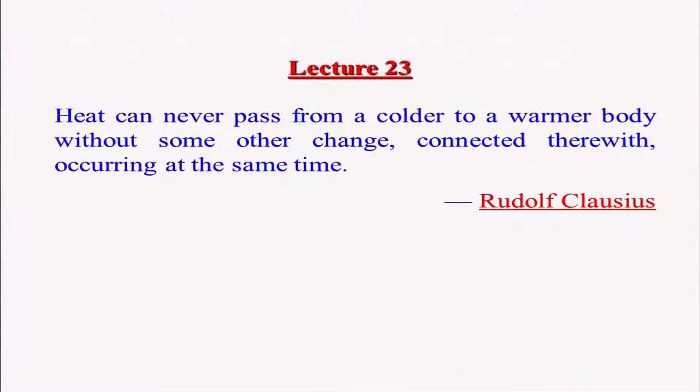We looked at two corollaries, Carnot corollary 1 and Carnot corollary 2, and we will now take up an example to see how you can apply the Carnot corollary and solve a problem. So let us take an example.

This example is related to a claim being made by an inventor, which is a thing one has to clarify by invoking the second law of thermodynamics. The example is like this: an inventor claims to have designed and developed a new heat engine that can produce 45 kilowatts of power by absorbing 52 kilowatts of heat from a thermal reservoir at 700 Kelvin while rejecting heat to the sink at 300 Kelvin. Is it true or false? That you need to find out.

If you look at this problem, the question arises whether the first law of thermodynamics is being satisfied or not, and then we need to look at whether the second law of thermodynamics is being satisfied or not. It is absorbing 52 kilowatts from a thermal reservoir at 700 Kelvin and producing 45 kilowatts of power. That means whatever heat is absorbed, some portion goes to the sink at 300 Kelvin and 45 kilowatts of power is produced. That means it looks like it may be true. Let us look at whether it is true or not.

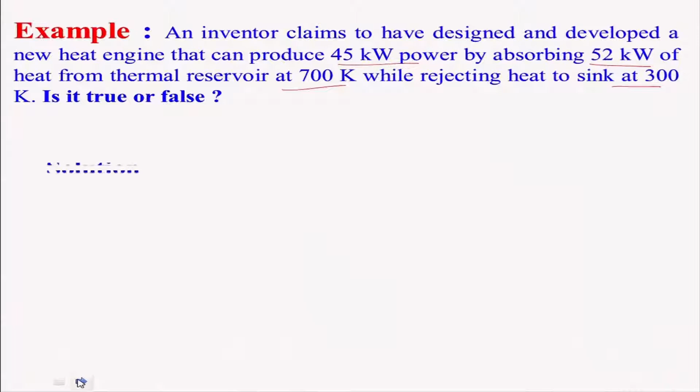For that we will have to find out the thermal efficiency. Thermal efficiency is nothing but W dot by Q dot, and the work produced by this heat engine is 45 and the heat absorbed from the source is 52. The efficiency is 86.5%, quite a bit.

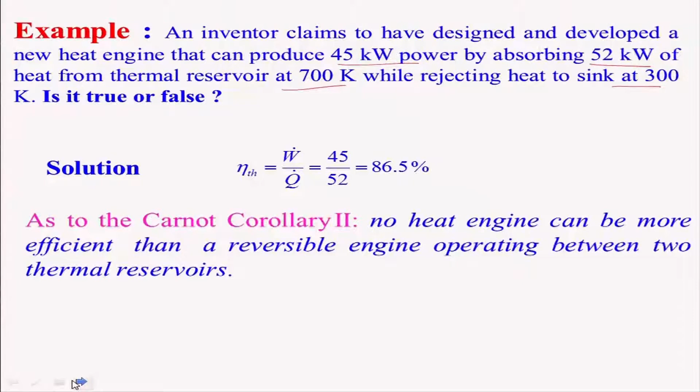Now we will have to invoke Carnot corollary 2, which says no heat engine can be more efficient than a reversible engine operating between two thermal reservoirs. Suppose this is the actual engine whose efficiency is 86.5%, and if a Carnot heat engine is operated between the source at 700 Kelvin and the sink at 300 Kelvin, what would be the efficiency? Efficiency equals 1 minus TL by TH, where TL is 300 Kelvin and TH, the temperature of the source, is 700 Kelvin, giving an efficiency of 57.1%.

That means a reversible engine gives 57.1%, while the inventor is claiming an efficiency of 86.5%. Therefore, it is not really possible, and hence the claim of this inventor is false. So using this very simple method, one can really find out whether such a claim is true or not.

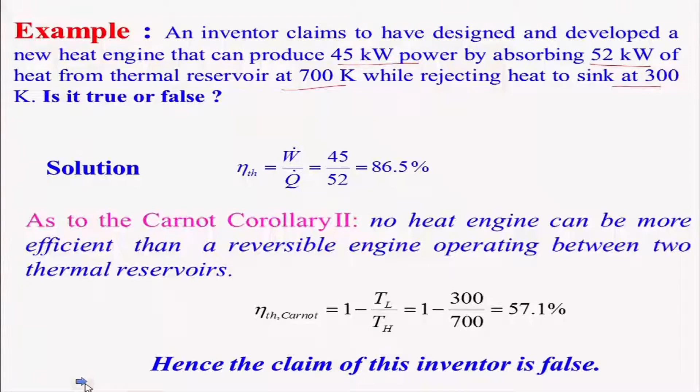Let us now see how we can apply the second law of thermodynamics for a temperature scale, which we have already discussed earlier. Let us devise a temperature scale which won't be dependent on the properties of the substance, which we have already defined as a thermodynamic temperature scale. If you recall, that is the thermodynamic temperature scale, which won't be dependent on the properties of the substance, like what we use in a mercury in glass thermometer.

If you look at the temperature, what it will measure will be dependent on the expansion of the mercury. But if I use alcohol, then that expansion will be different. So it will be dependent on the substance, the thermometric fluid rather.

However, we need to devise a temperature scale which will not be dependent on the properties of a substance. So why is this required?

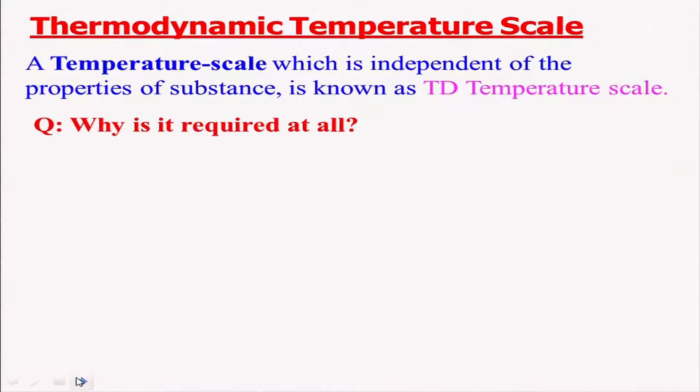We already know that whenever mercury glass and alcohol glass thermometers are used, even though they will be calibrated at the ice point and boiling point, they will give different temperatures at other points. You may calibrate at the same ice point and boiling point and assign those values, but if you deviate from the ice point and boiling point, it may give different values. For example, a mercury in glass thermometer will give you 50.12 degrees Celsius, whereas the alcohol in glass thermometer will give you 50.45 degrees Celsius.

Of course you may say it is not much, but accuracy-wise it is not good. So this indicates that the temperature scale is basically dependent on the properties of the thermometric fluid, because mercury and alcohol are different and their properties are different. Therefore we need a scale which is independent of the properties of the thermometric fluid or substance.

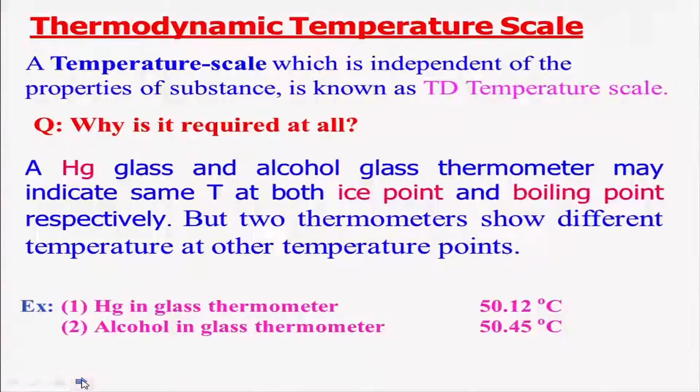So for that, we know that alcohol has different T-V relations, so it is very much required to devise a temperature scale. How can we devise such a temperature scale? For that, we will use the reversible engine concept from Carnot theorem 2.

We have seen that the efficiency of a reversible engine, or Carnot engine, is basically 1 minus QL divided by QH, which is equal to 1 minus TL by TH. This says that QH by QL is basically a function of TH and TL temperatures, both the source and the sink temperature - it is a function of them.

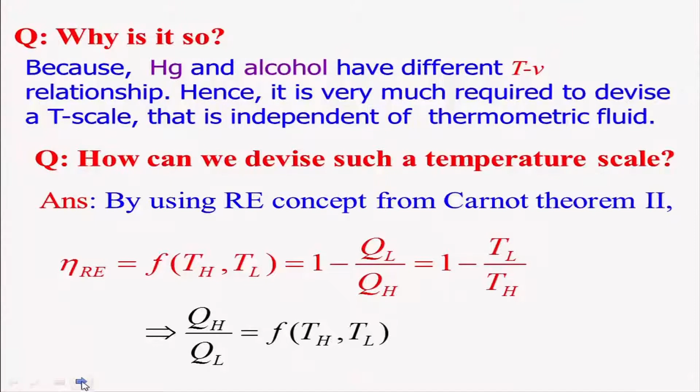So let us consider 3 reversible engines: reversible engine 1, 2 and 3. Let us say reversible engine 1 absorbs Q1 amount of heat and rejects Q2 amount of heat to sink 2, where T1 is greater than T2, and it does W1 amount of work.

It can act as a source or as a sink depending on the situation. Let us say another engine, the third engine, absorbs the same amount of Q1 from the source at T1, and it rejects Q3 amount of heat to sink 3, and it produces W3 amount of work.

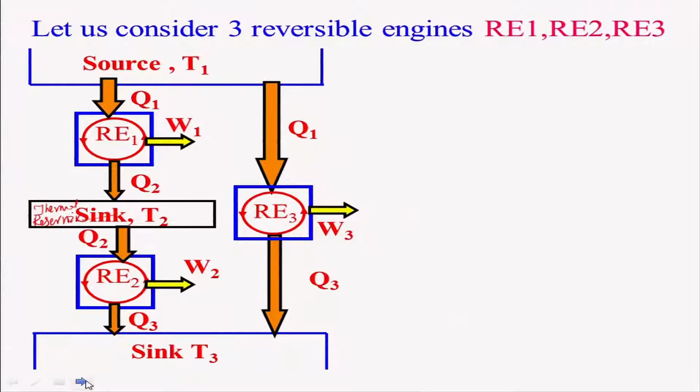Now if we look at engine 1, we know that Q1 by Q2 is a function of T1 and T2, if it is a reversible engine, as we have already seen. Similarly for engine 2, the Q2 and Q3 ratio is a function of T2 and T3.

T2 is the thermal reservoir 2's temperature, which will be acting as a source for reversible engine 2, while it will be acting as a sink for the first reversible engine. Similarly, for engine 3, we can say that Q1 by Q3 is basically a function of T1 and T3.

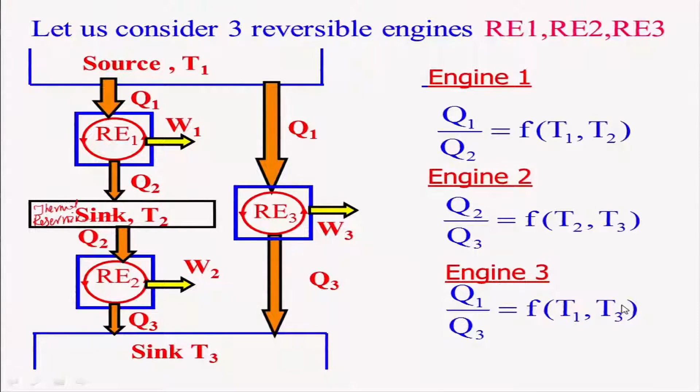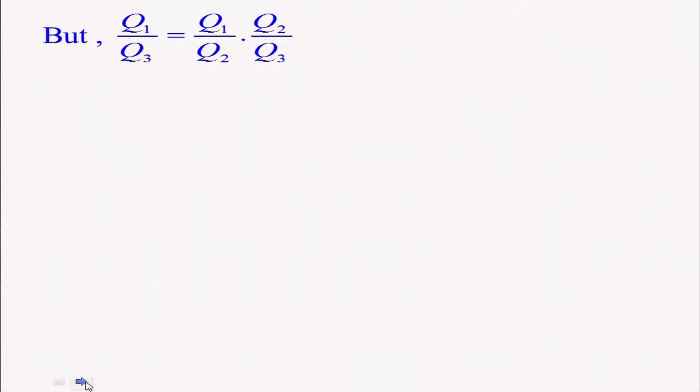Now if you say that Q1 by Q3 is equal to Q1 by Q2 into Q2 by Q3, this is possible only if we can say that Q1 by Q3 is a function of T1 and T3, Q1 by Q2 is a function of T1 and T2, and Q2 by Q3 is a function of T2 and T3.

So if you look at this, the LHS is independent of temperature T2, and the LHS is a function of T1 and T3, and the LHS is basically independent of temperature T2 - this is only possible if the function takes the following form.

If I say that this function f1 is equal to another function g of temperature T1 and T2, as a ratio of the temperatures T1 and T2, then the function f, which is a function of T2 to T3, is basically g(T2) divided by g(T3).

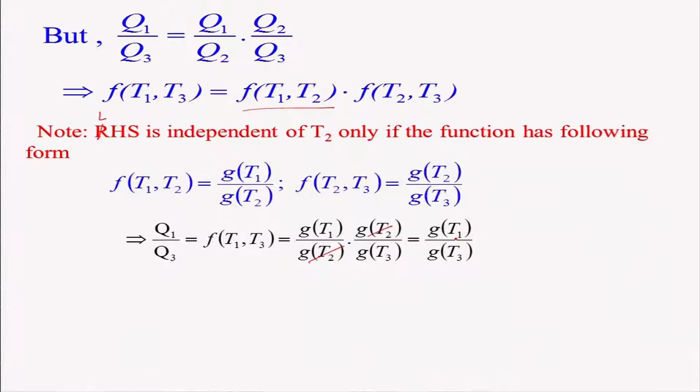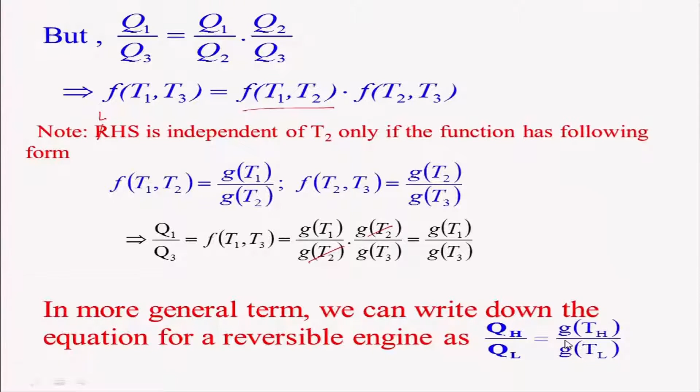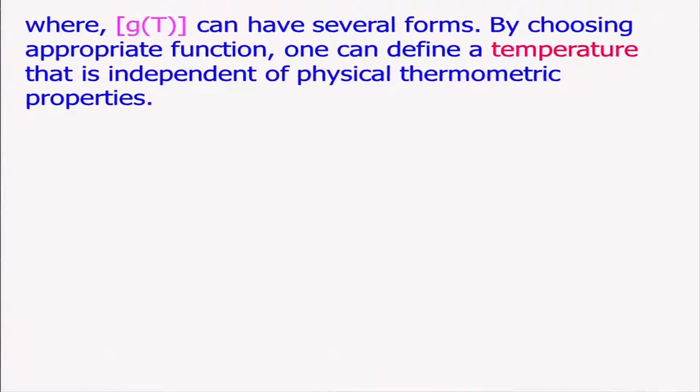If I say this, then it will cancel out, so we can say that Q1 by Q3 is a function of T1 by T3, two functions. Of course it can be any function. So in more general terms, we can write down the equation for a reversible engine as QH by QL is equal to G, which is a function of TH and a function of TL, where G can have several forms, you can think of any form. But by choosing an appropriate function, one can define a temperature which can be considered independent of the physical thermometric properties.

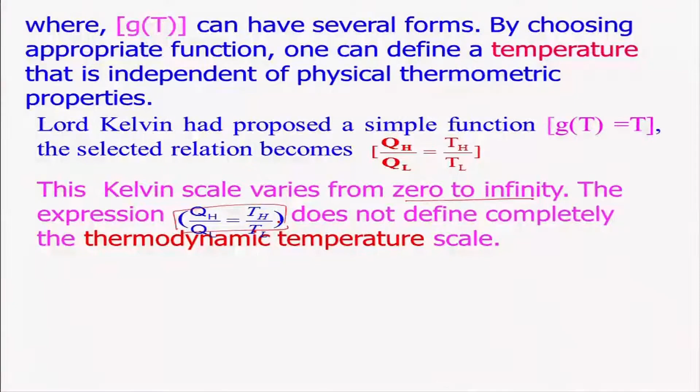Lord Kelvin proposed a simple function. He says g(T), that is the function, is equal to the temperature. Then the selected relation says that QH by QL will be equal to TH by TL. People have used complex functions and arrived at similar relationships. So this is the scale we call the Kelvin scale, which varies from 0 to infinity. The expression QH by QL does not really depend on the properties of the thermometric fluid, and even though it is a relationship, it does not completely define the thermodynamic scale, but it gives a relationship.

In 1954, the International Conference on Weights and Measures assigned a value of 273.16 to the triple point of water. As a result, you can get one point here, and then find that the magnitude of a Kelvin is basically defined as 1 by 273.16 Kelvin between absolute zero and the triple point of water. The triple point of water is 0.01 degree Celsius. So he has defined that, and absolute zero is considered to be 0 Kelvin. So by this way, one can use the second law of thermodynamics to define a thermodynamic temperature scale which will be independent of the thermometric fluid.

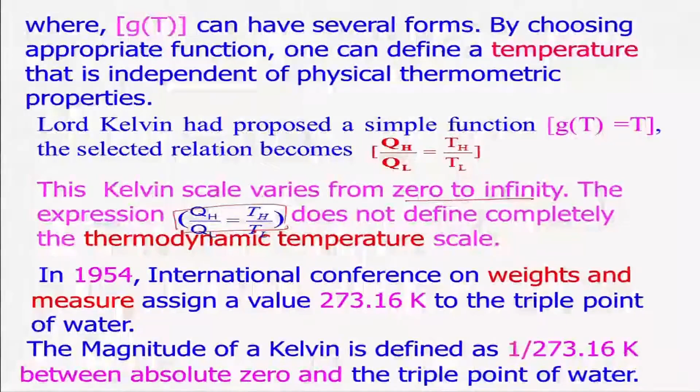So let us take an example to see whether this relationship can be used for solving some other problem. We have talked about a temperature scale, defining the Kelvin scale, and from that you can use it. But here we will be applying that for solving a problem.

Let us say a heat engine operated between a thermal reservoir at 500 Kelvin and ambient air at 300 Kelvin is used to drive a refrigerator to produce a temperature of 250 Kelvin by extracting heat of 100 kilowatt from the cold region. This heat engine is producing some work, and that work is being utilized to run the refrigerator. Assuming all the processes to be reversible, we need to determine the power produced by the heat engine, the ratio of heat energy absorbed by the refrigeration system to the heat energy absorbed by the heat engine, and also find out the amount of heat rejected to ambient air.

So let us say there is a source at T is equal to 500 Kelvin, and it is absorbing some amount of heat, let us say Q1. There is a reversible engine which is producing an amount of work W dot, and it is rejecting a certain amount of heat to the sink. The sink is at what temperature? That is at 300 Kelvin, and this is the same sink.

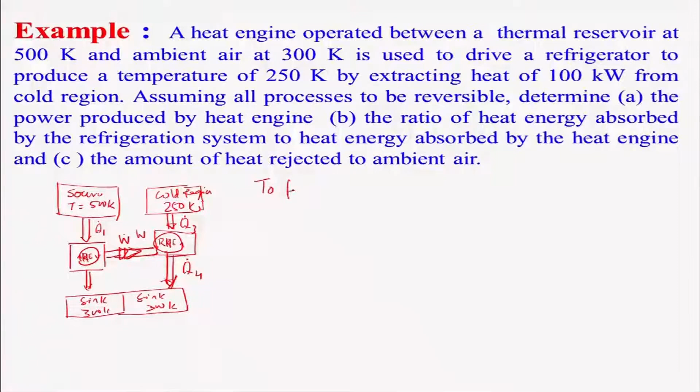Now, what is it to be found out? Basically we need to find the power produced, W, right, and that is W HE is equal to W RHE. RE is the RHE, let me put it, that means reverse heat engine, which is nothing but a refrigerator, right.

And how we will find out that? We know that coefficient of performance of the refrigerator, what is that? COP of refrigerator, if I say simply RHE, or I can say R is equal to, what is that? If I say this is TL, this is TL and this is TH, right, this I can say TR. Can I say that what will be coefficient of performance of the refrigerator?

That is nothing but your TR divided by TL minus TR, yes or no? We have already seen the coefficient of reversible refrigerator, right, or reverse heat engine, whatever you call. So, that is equal to TR is 250, this is 300, this is 250, is equal to what?

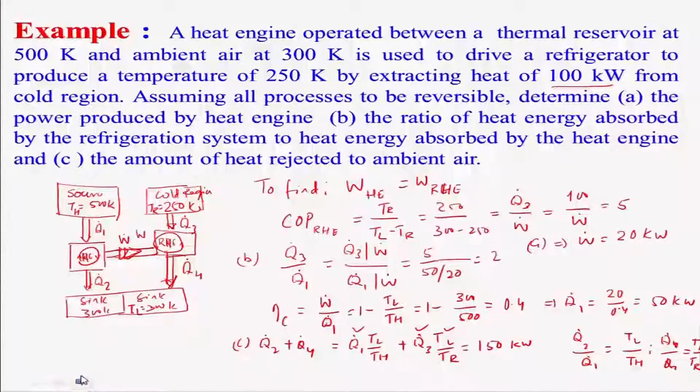Now what we will see is how we can use this second law of thermodynamics for other purposes, and we will have to apply this second law of thermodynamics for analysis of engineering problems. Whatever we have done is basically a cyclically operating device, but not all cyclically operating devices will be handled this way, we will also be handling various other cases. For that, let us consider the Carnot cycle, right.

In this case, the heat engine absorbs Q1 amount of heat, and it rejects Q2 amount of heat to the sink, which is at temperature T2, and it does W amount of work, because it is a reversible engine, right.

So for the Carnot cycle we know that Q1 divided by Q2 is equal to T1 by T2, and from this what can we write down? We can write down Q1 by T1 is equal to Q2 by T2, and I can take this out, that is nothing but Q1 divided by T1 minus Q2 divided by T2 is equal to 0. This is one relationship which we can derive.

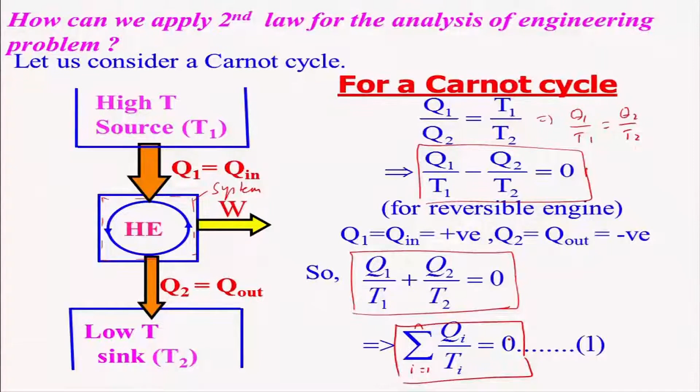So let us look at, because all the time we need not use the reversible heat engine, we will now consider the irreversible heat engine. Earlier we have considered the reversible heat engine, and now taking the irreversible heat engine, it is taking Q1 amount of heat from the source which is at temperature T1, and it is rejecting Q2 dash amount of heat to the sink, and it produces W amount of work.

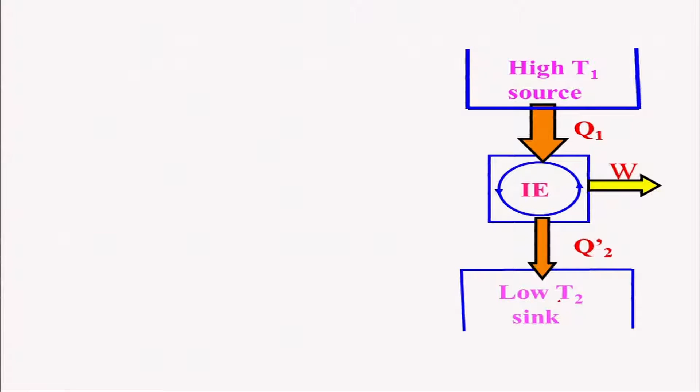So, for an irreversible engine, according to the Carnot corollary, the thermal efficiency of the irreversible engine will always be less than the reversible heat engine. So the irreversible engine efficiency will be 1 minus Q2 dash divided by Q1, and this is less than 1 minus Q2 divided by Q1.

And we know for the reversible heat engine, what will be the efficiency? Efficiency will be 1 minus T2 by T1, yes, from the Carnot, because the reversible engine is your Carnot. This corresponds to what you call Carnot efficiency, which is equal to 1 minus T2 by T1.

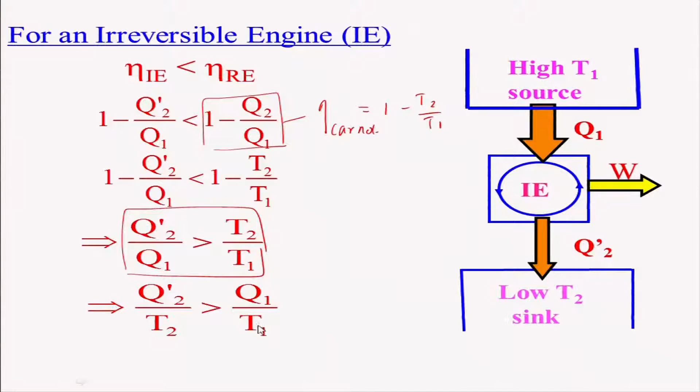So using the sign convention we have already discussed, in this case Q1 is basically being absorbed and Q2 dash is given to the sink, meaning it goes out of the irreversible engine. So therefore I take this negative, and I can write down that Q1 divided by T1 plus Q2 dash divided by T2 is less than 0.

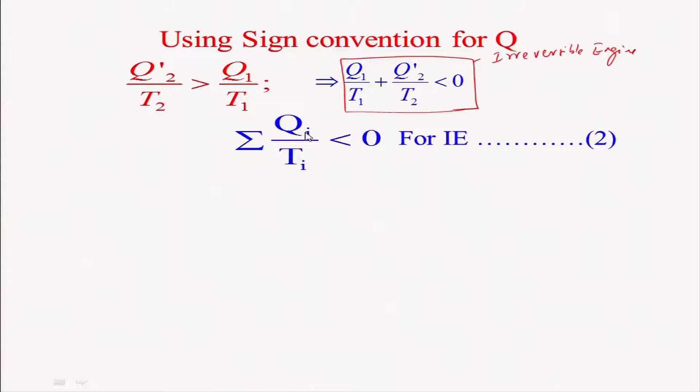So this is meant for irreversible engine. And if there are ith number of irreversible engines, I can write down summation of Qi dash i divided by Ti less than 0.

So if you combine this equation with the reversible engine, which is basically summation of Qi by Ti equal to 0, and the irreversible engine being less than 0, if I combine this I can write this expression: summation of this heat interaction Qi, for the ith engines,

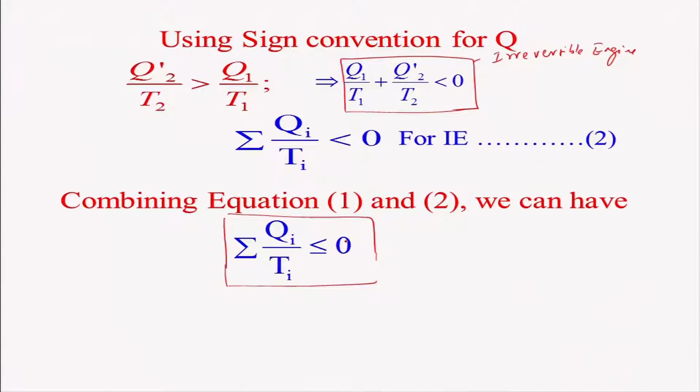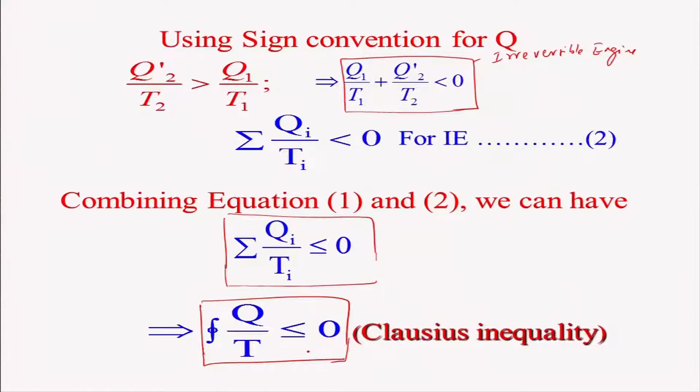divided by Ti is less than equal to 0, and that is nothing but your Clausius inequality. This is your Clausius inequality. What does it state? It states that whenever a system undergoes a cyclic change, however complex the cycle may be, the algebraic sum of all the heat interactions divided by the respective absolute temperature at which the heat interaction takes place, considered for the entire cycle, is less than equal to 0.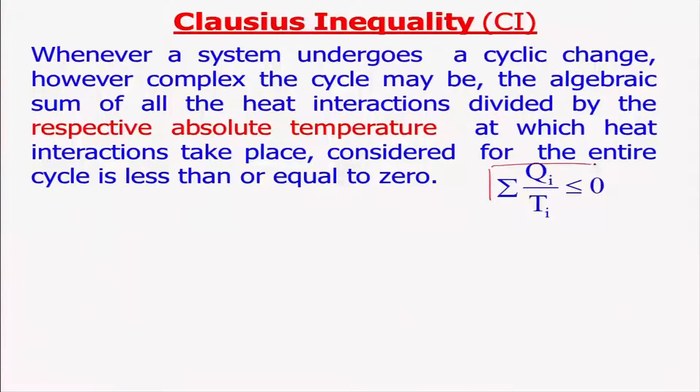That is the Clausius inequality, which we have just derived from the simple concept of the Carnot engine, that is a reversible engine, and we have also considered the irreversible engine. Mathematically one can write down the Qi divided by Ti, summed over all, is less than equal to 0. This is basically the mathematical expression of the Clausius inequality.

Keep in mind that this is basically the second law of thermodynamics, which can be applied not only for the heat engine but also for the refrigeration system, and which must be cyclically operated. That means it is applied cyclically.

Let us consider an example. A reversible heat engine operates between 3 reservoirs, at 600 Kelvin, 400 Kelvin and 300 Kelvin. It receives 2500 kilojoules of heat energy from the thermal reservoir at 600 Kelvin and does 1000 kilojoules of work. We need to determine the heat interaction with the other 2 reservoirs, that is 400 Kelvin and 300 Kelvin. So the question arises how to go about it.

Let us say this is the heat engine, I can take this as my system. Heat being absorbed Q1 is 2500 kilojoules, and some heat is rejected to the 400 Kelvin reservoir, and this engine also rejects Q3 to the 300 Kelvin thermal reservoir. And it does 1000 kilojoules of work, and keep in mind that this is a reversible heat engine.

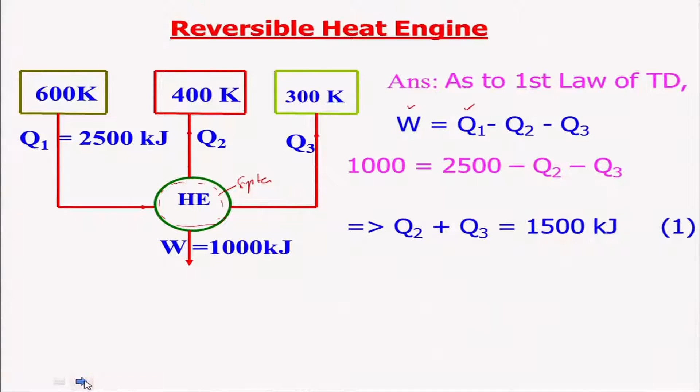So what will you have to do? You will have to apply the second law of thermodynamics. For this, we will use the Clausius inequality, that is dQ by T over the cycle is equal to q1 divided by t1 minus q2 divided by t2 minus q3 divided by t3, equal to 0, because this is a reversible heat engine.

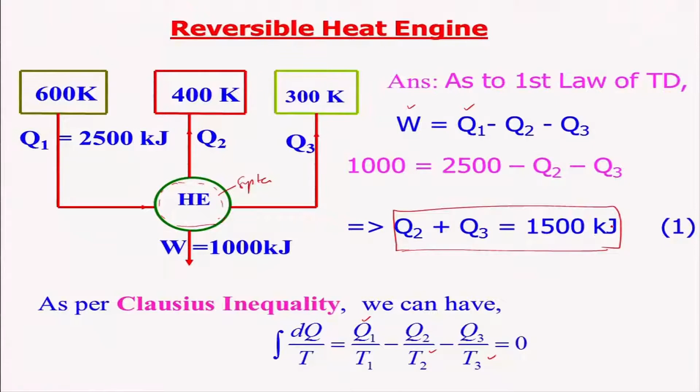In this case, q1 is given, and t1, t2, t3 are given, but q2 and q3 are not known. However, we can get an expression from here, and we have already derived an expression from the first law of thermodynamics, that is q2 plus q3 is equal to 1500 kilojoule. So if we solve these two equations, we can get the answer.

Let us see, we are getting q1 divided by 600 minus q2 divided by 400 minus q3 divided by 300 equal to 0. Why is it minus here? Because heat is going from the engine to the sink, so we have taken q2 as minus, and also q3, following the sign convention.

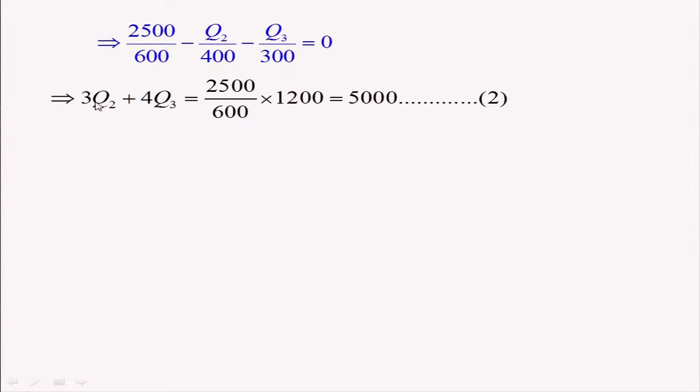That gives us equation 2: 3q2 plus 4q3 is equal to 5000. And if we already have the first law equation, if we subtract this one, it will cancel out, and we get q3 is equal to 500.

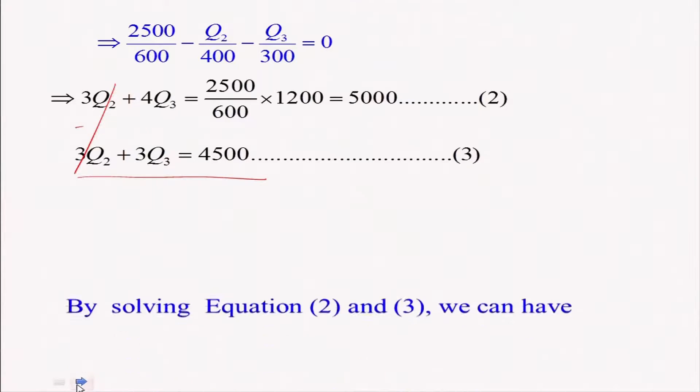From that, q3 is equal to 500 kilojoule, and from the other expression, using any one of them, Q2 is equal to 1000 kilojoule.

So till now we have seen how you can apply the second law of thermodynamics for a cyclic process. But not all processes are cyclic in nature. There will be some processes which are non-cyclic. Now the question arises how to go about it.

If you remember, we derived the first law of thermodynamics for the cyclic process first, and then applied it for the non-cyclic process. What did we do there at that time? Could you recall how we did it? We have done that already for the first law of thermodynamics.

The first law of thermodynamics says cyclic integral of heat will be proportional to cyclic integral of work, and then we say it is equal to J, the Joule's constant. From that we derived an expression, dE equals dQ minus dW, that is the first law for non-cyclic process. We will be following a similar procedure here.

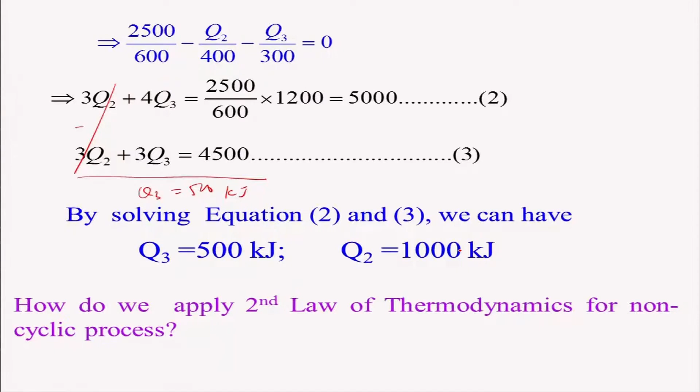If you look at it, we have seen that whenever a system undergoes a cyclic change, however complex the cycle may be, the algebraic sum of all heat interaction divided by the respective absolute temperature at which the heat interaction takes place, considered for the entire cycle, is less than or equal to 0. That is the Clausius inequality.

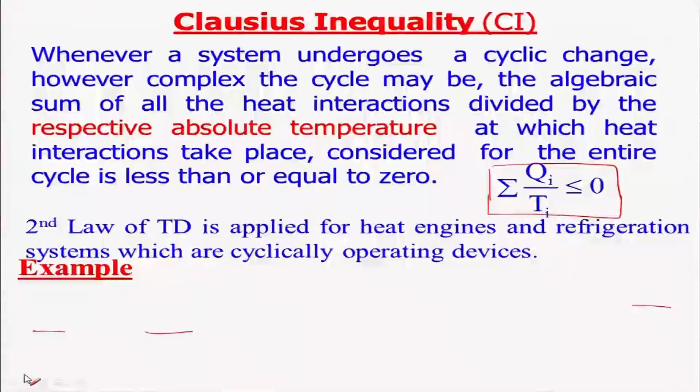And before that, we have seen how one can devise the thermodynamic temperature scale using the second law of thermodynamics. So in the next lecture, we will discuss how to apply the second law of thermodynamics for the non-cyclic process. Thank you very much.